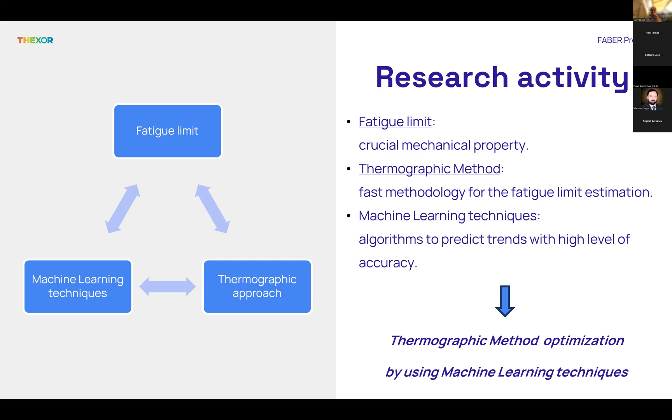Regarding the artificial intelligence aspects, machine learning techniques are very powerful algorithms to predict a trend with a high level of accuracy. So the results obtained from this preliminary research activity lead to an optimization of the thermographic method by using machine learning techniques, as we will discuss during this presentation. This work consists of several parts. The thermographic method and the machine learning techniques are introduced. Then the experimental activity carried out in this work is presented, and the last part is related to a discussion of the results and the conclusions of this research activity.

The thermographic method is an alternative approach to the classical staircase analysis for the fatigue limit assessment.

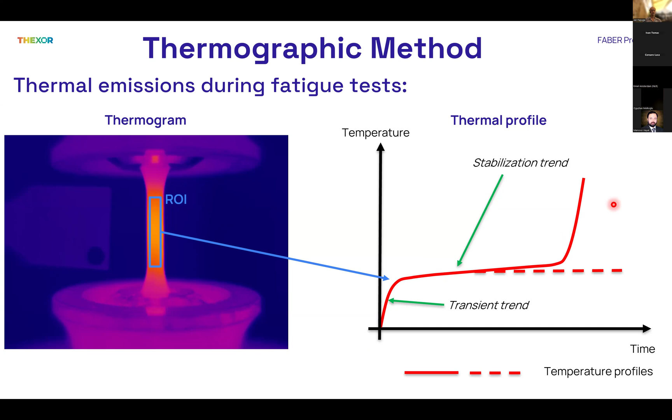As I said before, the thermographic method is an alternative approach to the classical staircase methodology for the fatigue limit assessment. And this methodology adopts the thermal emissions produced during the fatigue test. This slide reports an example of a thermal profile obtained from the thermal emissions. This thermal profile is extracted from a region of interest located over the surface of the sample from the thermogram. This thermal profile is characterized by a transient trend followed by a stabilized trend. This stabilized trend may remain stable in case of a stress amplitude lower than the corresponding fatigue limit of the material. On the other hand, this stabilized trend may increase with a rapid temperature increment in case of a stress amplitude higher than the corresponding fatigue limit of the material.

The thermomechanical equilibrium behind the thermal profile is reported in this slide. Boulanger and his colleagues present this study, and the thermomechanical equilibrium consists basically of two parts. On the left side, there are differential operators applied to the temperature in terms of time derivative and spatial analysis. On the right side, there are different heat sources involved during the heat generation.

And the first heat source is related to the intrinsic dissipations, and in this case, the heat generation is produced within the material when the specimen is subjected to a certain load. The second contribution is the thermoelastic source. Then the third heat source is related to possible internal coupling sources caused by the microstructural state of the material when it is subjected to a certain load.

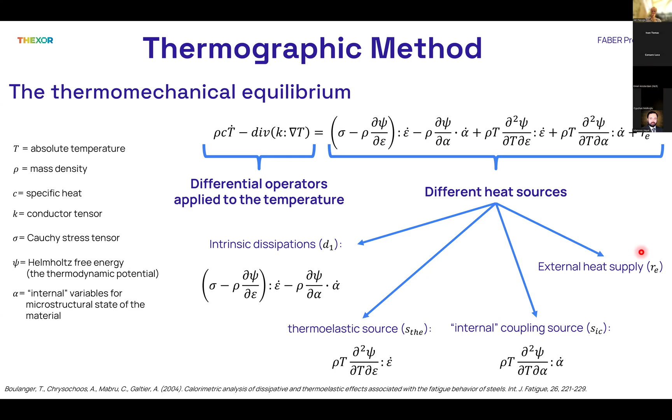And the last contribution is referred to possible external heating sources. Then the thermomechanical equilibrium can be simplified to consider the infrared image processing, and the hypotheses are listed on the left side. In particular, there are constant density and specific heat, negligible convective terms. The conductive tensor is constant during the fatigue test, and the external heating sources are considered independent of time, with the aim of satisfying the equilibrium temperature field reported here.

And the last hypothesis considers that the temperature variation due to the fatigue test does not influence the material microstructure. So at the end, the thermomechanical equilibrium can be simplified considering just the temperature variations and its sources due to intrinsic dissipations and thermoelastic effects.

Focusing on the intrinsic dissipations, the factors involved during the heat generation are different depending on the load. In case of low stress amplitude, for example below the fatigue limit, the heat generation is mainly caused by anelastic phenomena. On the other hand, in case of high stress amplitude, for example above the fatigue limit, the heat generation is mainly caused by movements of dislocations or microplasticization effects.

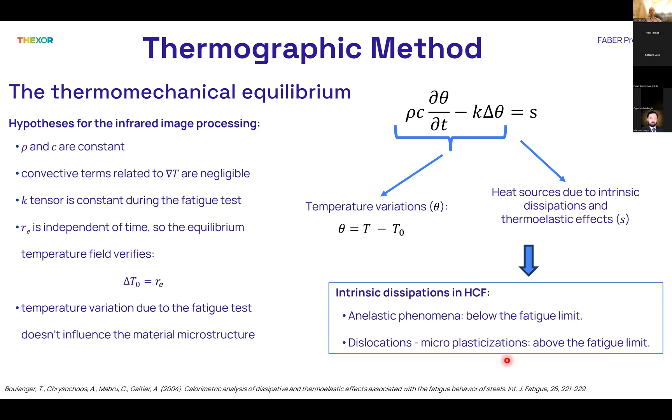In order to investigate the intrinsic dissipations produced during the fatigue test, thermal parameters have been properly developed over the years, and the thermal parameters are calculated from the thermal profiles obtained from a certain fatigue test in which a certain stress amplitude is adopted.

The first possibility is the thermal area, which basically consists of the area subtended by the thermal profile. The second possibility is the thermal increment, which consists of a temperature increment of the thermal profile. And the last possibility is the thermal gradient, which takes into account the transient zone. These thermal parameters are calculated for a certain number of fatigue cycles, and in general, this value is less than 200,000 fatigue cycles.

Then the fatigue limit is estimated by analyzing the thermal parameters evolution as a function of the stress amplitude adopted during the fatigue test. The fatigue tests are interrupted when an abrupt thermal parameters increment is detected during the thermal parameters evolution. And each of these circles corresponds to a certain thermal parameter calculated from the thermal profile obtained during a certain fatigue test with a certain stress amplitude.

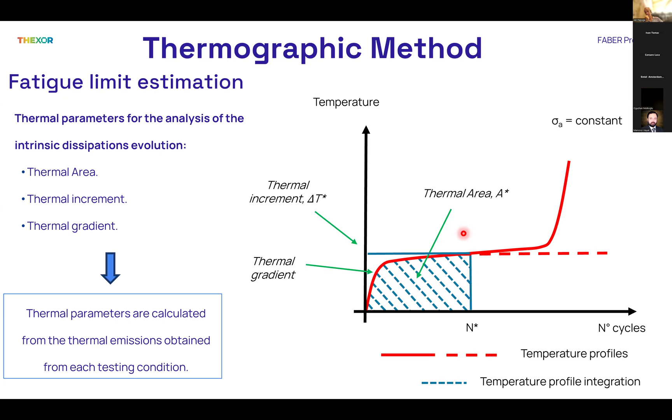The idea is to start with a very low value of stress amplitude, and that's then the lower curve, yeah. But yes, the second part, either you will get very quickly to exhaustion of the fatigue resistance of the material. So you make, for example, just 2 or 3 steps, and then you have to interpolate on a very small number of specimens, or you need more specimens for that.

No, but in general, one specimen is enough. Because in general, the number of points in this part where there is an abrupt thermal parameter increment is not more than 2 or 3 points. So this is enough for you. Okay, that's the important point. Thanks a lot.

Can I continue? Okay, so at the end, the most appropriate choice in terms of approximating curves or in terms of thermal parameter depends on the experience, on the material, or on the load applied during the fatigue test. In general, the evaluation is done on the basis of the thermal parameters evolution obtained during the fatigue test. So the thermographic method has advantages in terms of rapidity and non-destructive approach.

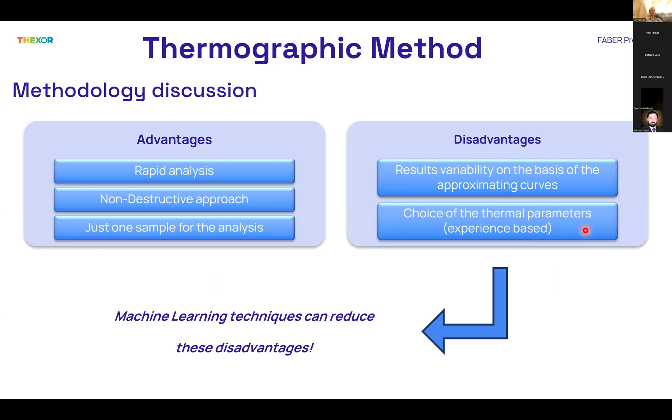Not covering all machine learning techniques, we can categorize machine learning technologies into 5 main categories: supervised, unsupervised, semi-supervised, reinforcement learning, and deep learning. In supervised learning, we can subcategorize the techniques into regression models and classification models. In regression models, support vector regression or support vector machines, Gaussian process regression, and artificial neural networks are widely used. Neural networks are the core technology of LLMs, large language models, like GPT and so on.

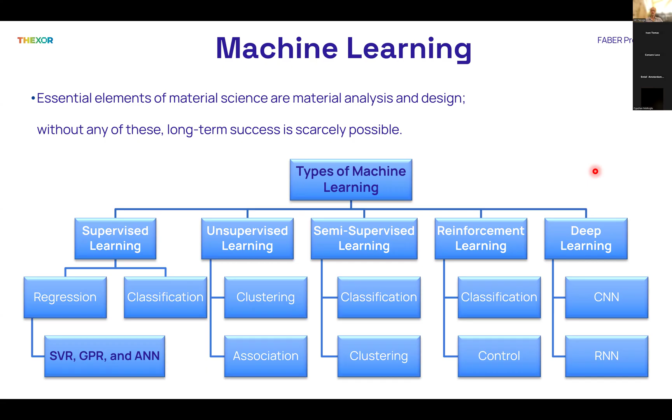Going further into regression models, support vector regression, SVR, was designed to expand the SVM framework for continuous output evaluations. SVR is a nonlinear extension of linear regression. SVR's kernel technique makes it a flexible and reliable way to interpolate, and it is very fast and reliable. In easy words, I call the SVR the deterministic workhorse.

So it will extrapolate the whole data set into a 3D realm. It will plot a surface that is the best fit into the 3D scheme that has already been scattered of the data set. It will reproject the plot into the 2D realm, and it will announce that best fit plot to you. So by hyperparameters like cost, epsilon, and gamma, you can fine-tune the model to avoid overfitting, to predict exactly your data set and your data points.

That is not the case in our research, because we want the interpolation between the real points, real pairs of stress amplitude and thermal parameters, but generally we have to be aware of overfitting.

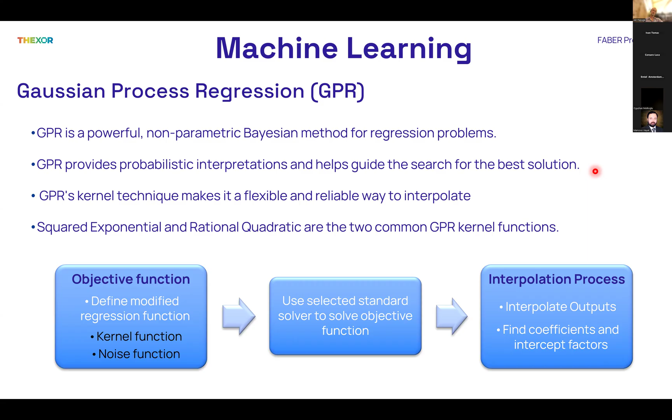Squared exponential and rational quadratic are the two common GPR kernel functions, the two most important parameters of setting up GPR. So to set up GPR, in simple words, you have to define the modified regression function, like kernel function and noise function. Use, again, the selected standard solver to solve the objective function, and have your interpolated outputs and coefficient and intercept factors.

So again, if I want to be more accurate, I can say the technology that I love to use is artificial neural networks. If I want to simplify artificial neural networks into simple words, I can say that neural networks are the nearest technology to the human brain. From the 1950s and 1960s, neural networks have evolved by inspiration of the human brain.

The core structure of neural networks consists of a limited number of layers. In each layer, you can define numbers of neurons, and in each neuron you will have a function. These layers, neurons and functions together will learn from the input data set that you define for them, even qualitative, even quantitative, and you can have your preferred output result, like interpolation, extrapolation, whatever you wish from the neural network. Obviously, it is not unlimited, it is limited, but it could produce the best.

So in our work, we used a feed-forward neural network, fully connected. The input layer was set to the stress amplitude and the thermal parameters. We used 3 hidden layers: the first layer 128, the second 64, and the third 32 neurons. We used ReLU activation, batch normalization to stabilize training, a 20% dropout to avoid overfitting, and L2 regularization, and we used the Adam optimizer, converging in less than 200 epochs, which is a normal setup for an artificial neural network.

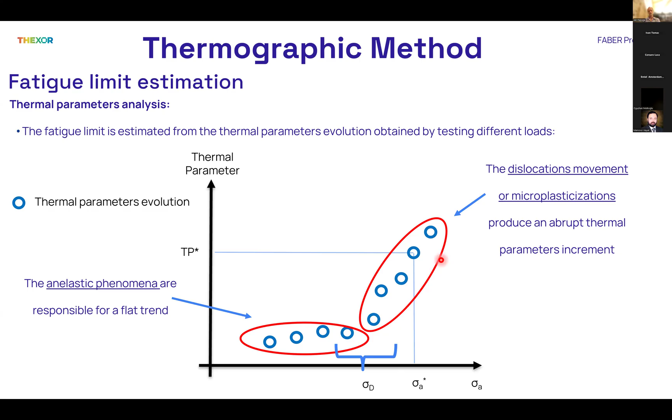And the other issue was that obviously machine learning techniques are so strong and so accurate, so we could reduce the uncertainty so much. For evaluating the machine learning technology, we have the accuracy metrics that the audience surely knows, like mean squared error, RMSE, mean absolute error, MAPE, and R squared. Generally, we use RMSE and R squared to evaluate and check the validity of our models.

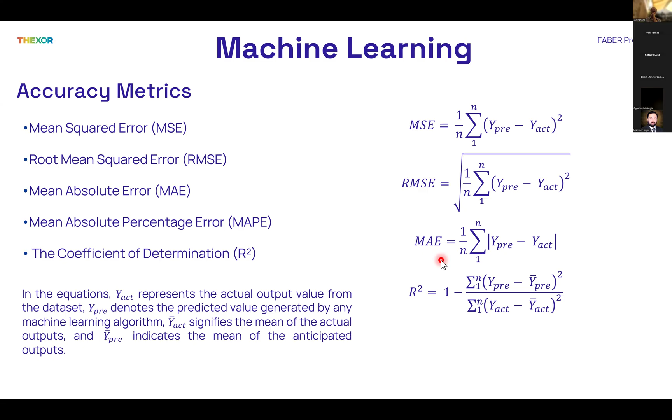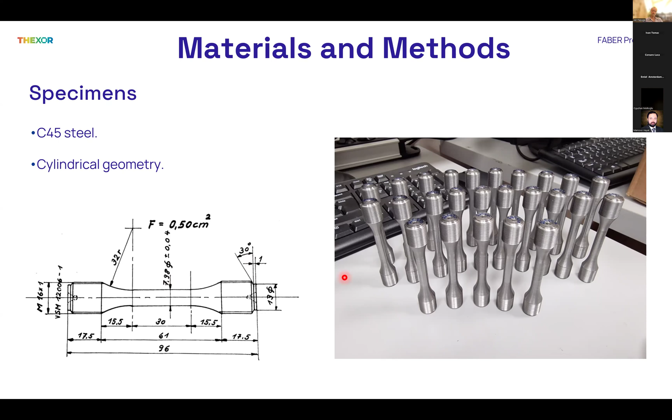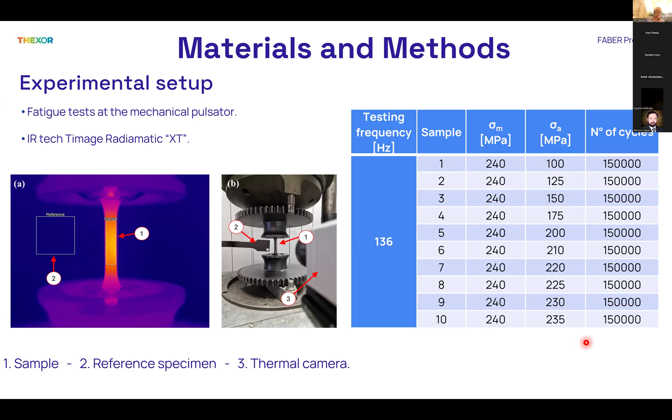Then the fatigue limit estimated by using the staircase methodology was around 210 megapascal. So this was our reference value in order to compare the results obtained from the classical thermographic approach and the thermographic approach improved by using the artificial neural network technique.

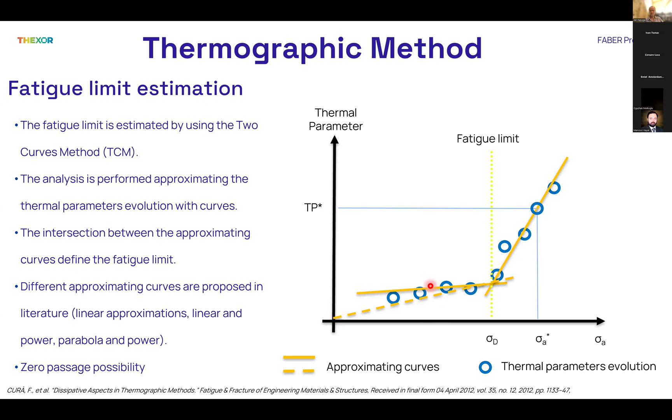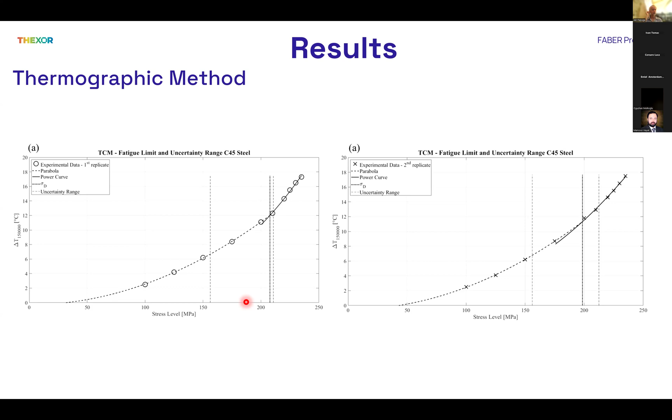plus/minus 5 megapascal. So here is the magic of ML, which happens when we interpolate the data into the central zone by considering and not avoiding the gradient between the anelastic zone and the microplasticization zone; we will see a very, very significant reduction in uncertainty range. So if you see this slide, we could see the lowest number as 157 and the highest number as 208. But here, with the help of machine learning, we will see that the lowest number will become 179 and the highest number will become 213.

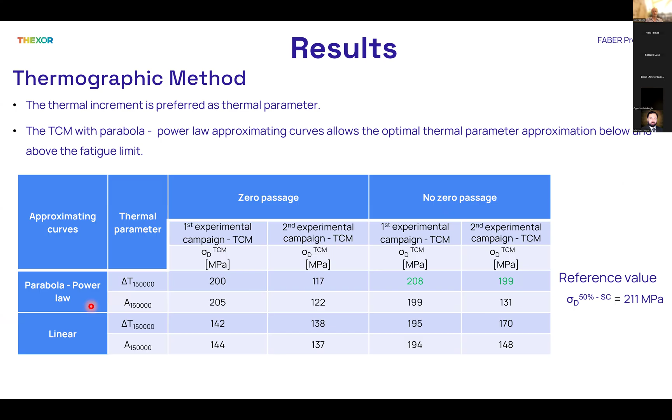Another advantage of using ML, that Dr. Corsaro said in the previous slide: the TCM is completely reliant on the configuration, considering the zero passage or not considering the zero passage, the thermal parameter like thermal area or thermal increment, or approximating curves; it is completely dependent on this type of configuration. But with the help of ML, we removed another type of dependency.

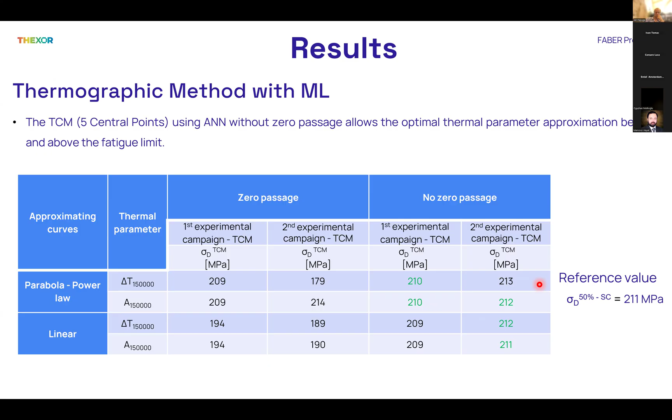We again reduced uncertainty. You can see that the staircase reference was 211 with the standard deviation of plus/minus 5 megapascal, and this whole configuration with not considering the zero passage, independent of the linear or parabola power law approximating curve or of the thermal increment or thermal area, all of these results could be considered as a valid result, as a reliable result. So again, ML did, I can say, a very huge job to reduce the uncertainty of the classical TCM method.

And for the final slide of the results, if we compare the absolute error in percentage between the classical TCM and enhanced TCM with ML in comparison with the staircase reference value that is 211 megapascal, you can see that we decreased the absolute error from 42.18%, for example, to 1.4%, or from 34.6% to 10.4%. And again, in this configuration, we will see all the absolute errors in the TCM that is enhanced with ML are below 1%. That is absolutely valid and reliable.

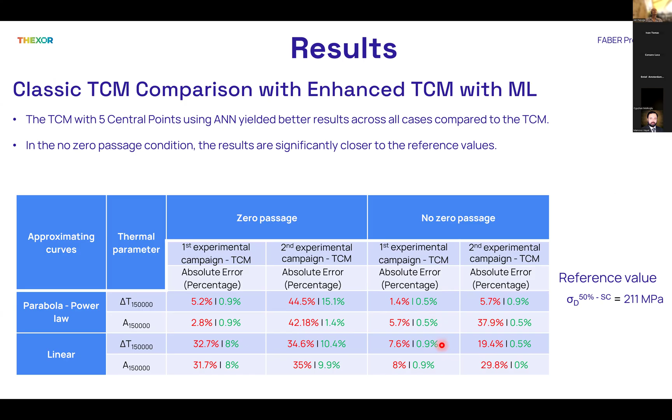So for conclusion, I can say the implementation of ML technique resulted in enhancement of the original datasets with respect to those obtained from the original experimental campaign. The second one is the improved dataset led to decreased uncertainty in significant values by means of lower variance and better accuracy metrics.

Actually, if I want to say one of the accuracy metrics that were derived in this research, we developed the R square from 91% to 97%, or we decreased the RMSE on the thermal parameter by nearly 60%, from 0.019 to 0.008. So these are the main conclusions on the side of ML that enhance the dataset.

And from the fatigue limit estimation point of view, a reduction in the variability was observed among the approximating curves and the thermal parameters adopted for the analysis, and the whole developed technique led to a reduction of the amount of time in the experimental campaign for the assessment of the fatigue limit.

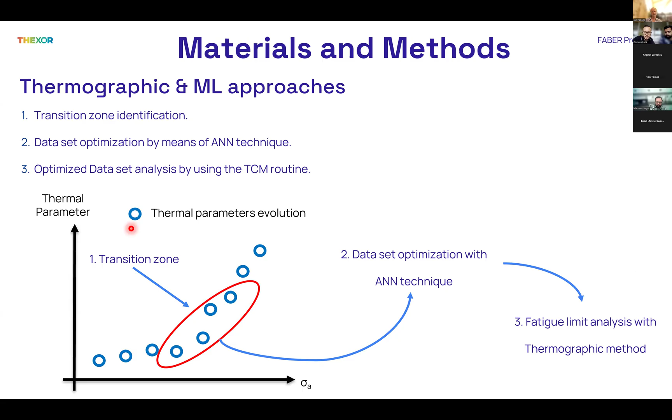Yes, maybe I can share my screen again. There were differences between the two experimental campaigns in the transition zone. And by the way, what was the final surface quality for these specimens? It was a classical ground surface. So just a ground surface, no polishing. Here, the thermal parameters are not overlapped in the transition zone where the fatigue limit occurs, and you can also see this behavior in the thermal profiles evolution.

Yeah, but I would say this is a minor scatter compared to some of our results. For sure. This is awesome. Yeah, for sure. We are in the transition zone where the fatigue limit is. Okay.

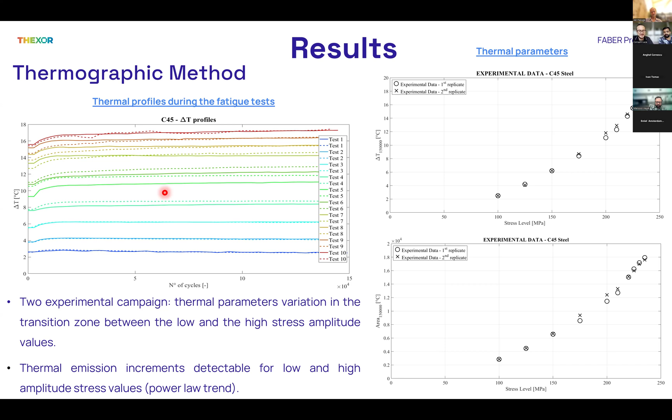So, other questions, please. I would mention that if everything proceeds well, in July, on the 24th or so, there should be another lecture by Alek Karolczuk on using Gaussian processes for multiaxial fatigue estimation. So we can stay with Gaussian processes for quite a long time.